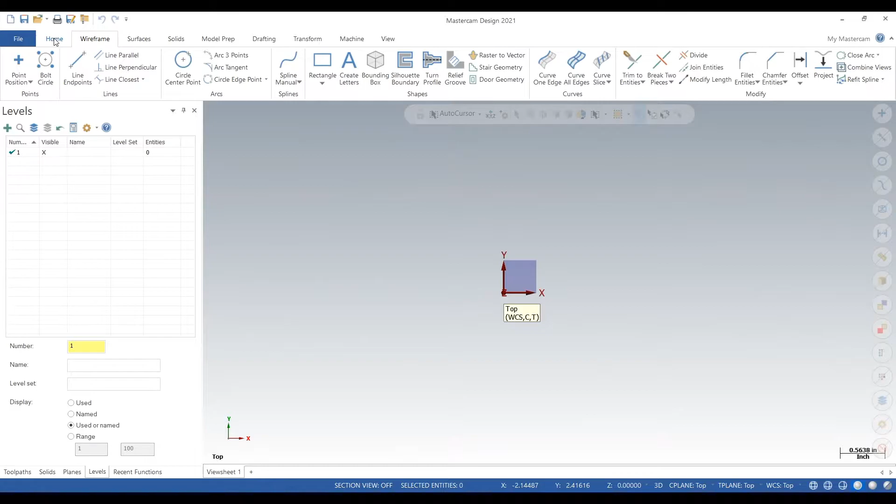So we're in Mastercam 2021, and what we want to do is start creating the vacuum fixture. We want to make an aluminum block, so we're going to draw some wireframe, and make our width 6 inches, height 6 inches, so 6 by 6.

Next, we want to go to solids and click on extrude. Click on our wireframe, click the check, and we'll give it a distance of 3 inches.

So there's our block. This is the very start of our vacuum fixture. So we start with a block.

Next, we click on curve all edges under wireframe. So we give that block, all of its edges will have wireframe, so we can click on it and program off of it.

Next, we want to duplicate that top plane. We'll call it our build plane, and we'll move it over to the side of the block.

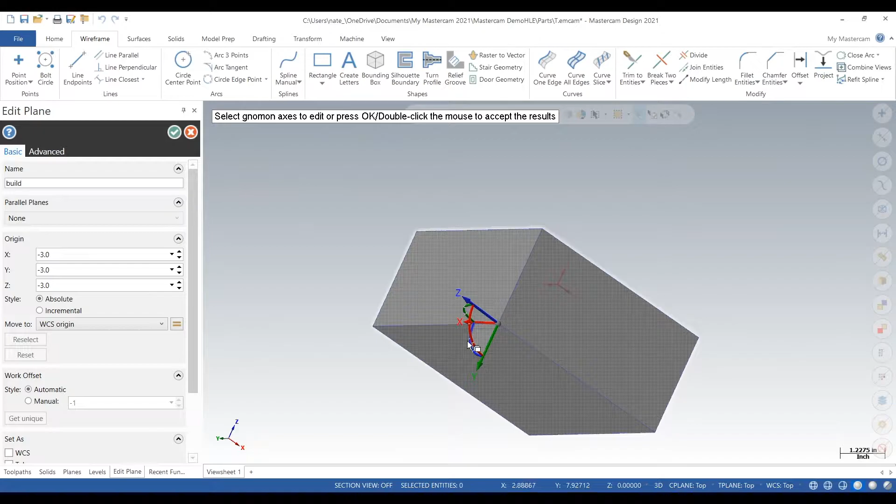We'll rotate everything so we kind of have a view of this side looking down. So rotate our Z 90 degrees. Rotate our Y, click the check.

We need to change that view because that's not quite what we want. Okay, that looks good. Now we are going to build the hole that the vacuum plugs into.

So we kind of want to do what we did before. We want to draw some wireframe and then extrude. So first we'll draw a line.

Oh, that's going the wrong way. Make sure our construction plane is correct. We can delete that line. We'll try this again.

Length, we'll type in 3/4 of an inch.

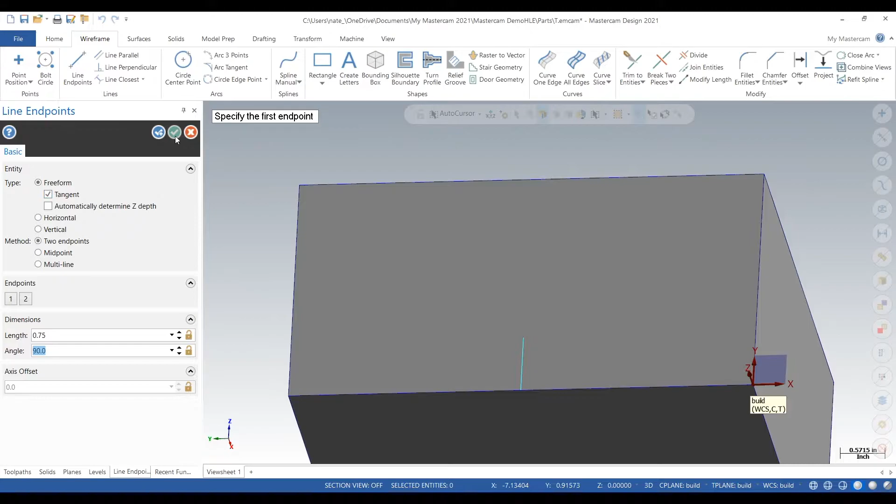Next, we want to go to easyspeedsandfeeds.com and find a pipe tap, because that's the fitting we'll be using. We'll be using a pipe tap fitting, and we're going to go to NPT NPTF.

And we'll use 1/4, so the hole we need to leave is 437 thou. So that's what we'll do. Make a circle that's 437 thou.

Okay, so that hole, we want it more towards the bottom. So we'll redo these steps.

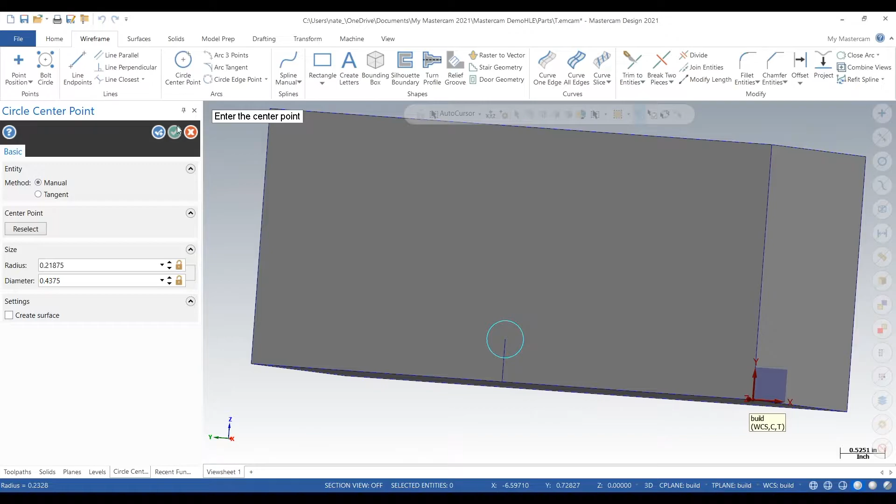And why we want it towards the bottom and this fixture extra thick is so we can reuse this fixture over and over again. If it was a thin fixture and we machine the top of it, we can maybe only get one use out of it. But if it's 3 inches thick, we can shave off the top and then remachine it in for a different part.

Okay, so we're extruding that hole. We want to go 5.5 inches into the fixture.

So our fitting will fit in that hole, our 1/4 18, and the vacuum will plug into that hole. So this is the beginning of our vacuum fixture.

So we're just checking everything here.

So what we want to do is merge this vacuum fixture with our part. I'll show you guys how to do that. So we'll save this, save it to my desktop, call it vacuum, call it vacuum chuck. Alright, so here's our part.

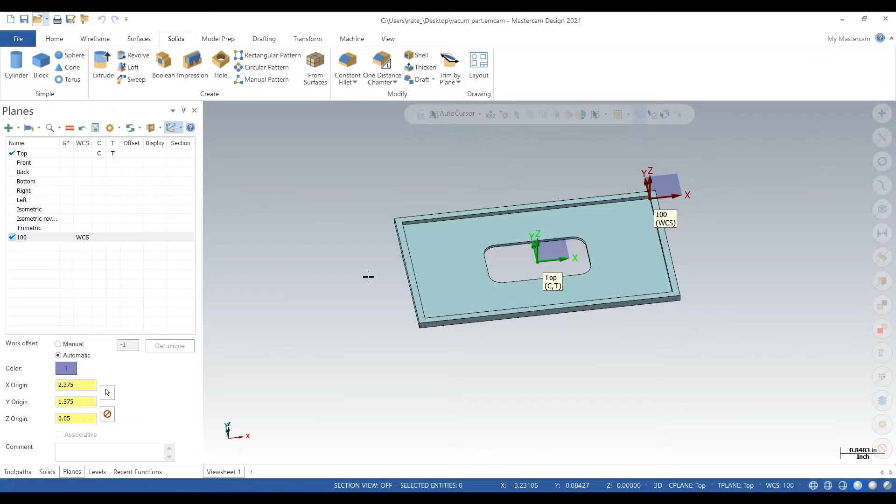It's very thin. And what we want to do is merge our vacuum fixture into this Mastercam file so we can put this part on top of it and then start designing how we're going to hold this part. So as you can see, that's 50 thou right there. So we definitely want to hold this with vacuum, pulling it down so we can machine this thing and we can machine it accurately. So we go to File, click on Merge.

And then we want to go back to desktop where we saved it, click on Vacuum. We clicked on the wrong one. That's the vacuum part. We want to click on the vacuum chuck.

So File, Merge, we go to desktop, click on vacuum chuck, and there it is. So that's how you merge two files in Mastercam.

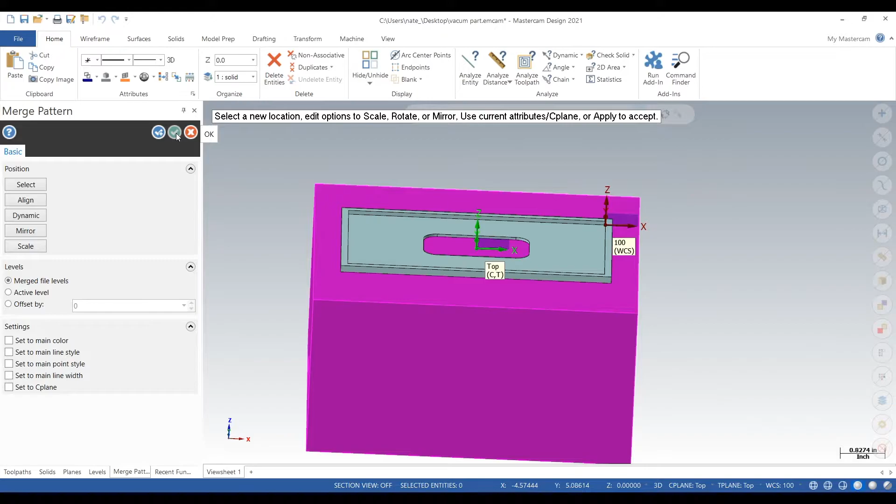Okay, so we got lucky and it kind of positioned itself really well.

So what we want to do, since we have all these solids, is we want to split them up on different levels. So we can activate different levels and just view either the vacuum chuck or the part or their wireframes.

So we'll create a level 3, call it vacuum chuck, create a level 4, call it vacuum chuck wireframe.

And we'll start moving this stuff around. So we'll select all wireframe and we'll move it to level 4. Next, we'll click on the vacuum solid and we'll move it to level 3.

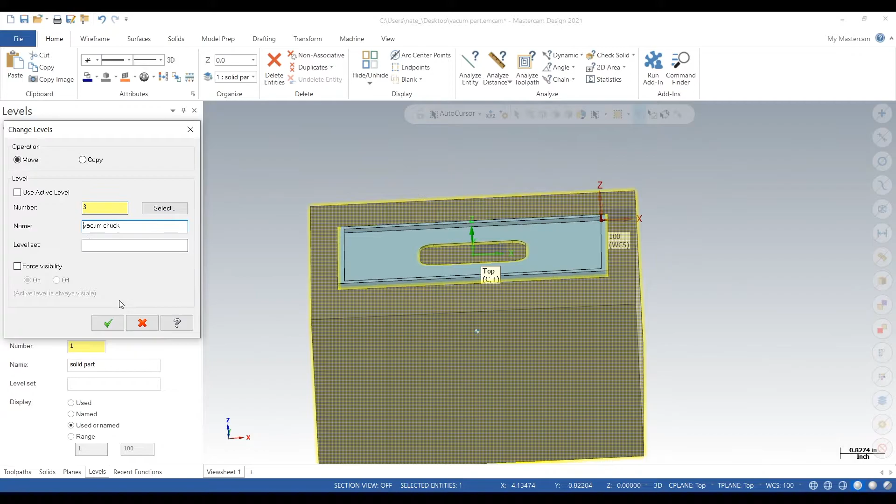So now we can activate these different levels and view our different solids. So here's our vacuum chuck. There's our solid part. That's pretty important. You keep everything on a different level so it's all organized and easy to work with.

So we're going to rename the plane 100 to build because we'll be moving it all over the place. Move that plane to the bottom of the part.

I want to select the part, go to wireframe, and click curve all edges, or silhouette boundary actually. This will just make a boundary on this face. But we went with curve all edges, which both work. So we'll just click on all this wireframe.

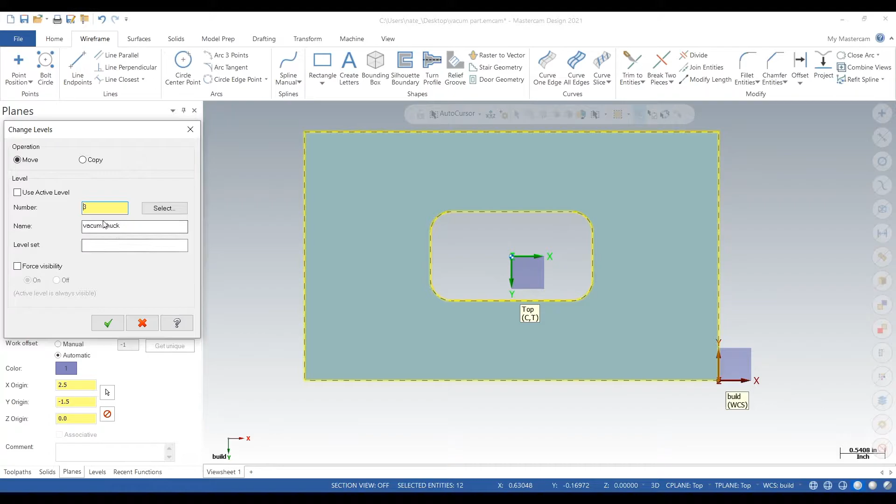And we're going to move it to level 3. So we're moving that wireframe to the vacuum chuck level. So now we can go to the vacuum chuck level and deselect our part. And now we have an outline of our part on the vacuum chuck level. That's kind of the first step of building a vacuum chuck, is you need a profile of your part.

So we're going to move our build plane to the top right corner of our vacuum chuck, and we're going to start designing and extruding and adding wireframe to this vacuum chuck so our part can fit in it.

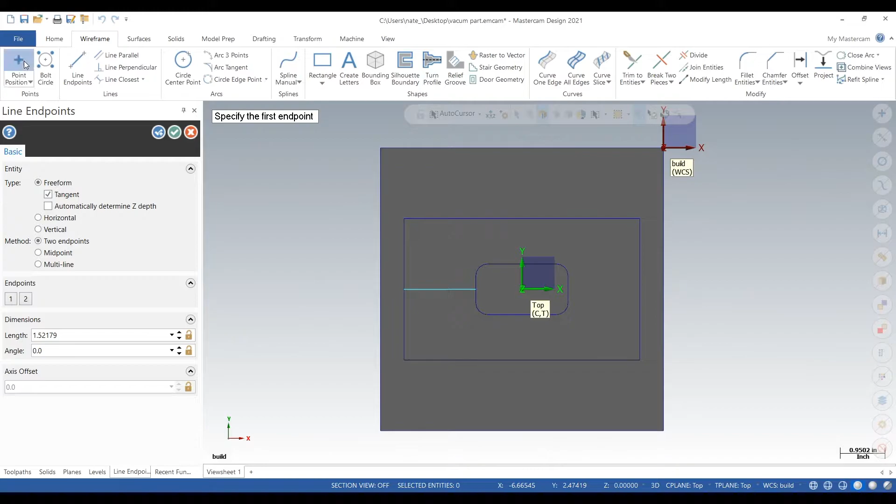So we're going to draw a line, and we're going to draw a point, and on that point we'll draw a circle, and then we'll extrude all the way down to that hole we put in earlier. So we'll call it 300 thou.

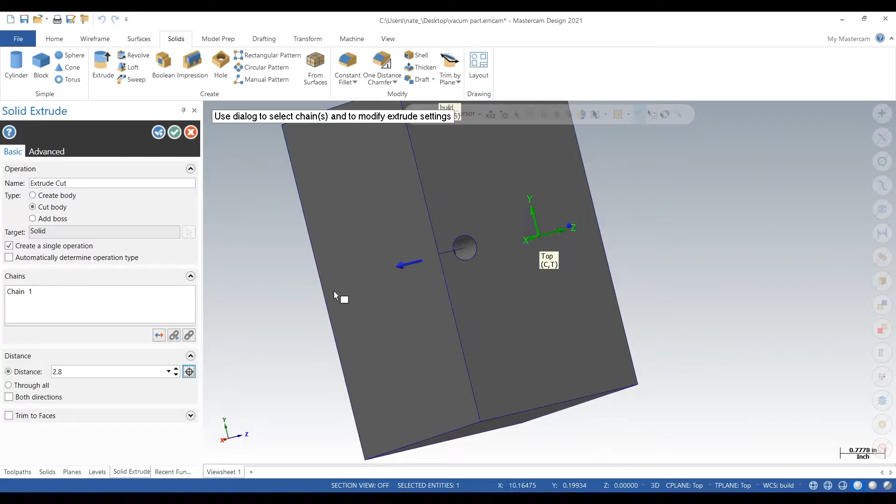And we are going to extrude that hole all the way down to our hole we put in earlier. That will create an airway. So the vacuum will pull through the hole on the side, suck air through there, and then it will go up to where our part is. Okay, looks like there's a good intersection there and it's not breaking through.

So next, we are going to create circles on all the corners of our boundary. What we want to do is relieve the corners so when we go around with an end mill, the part can fit in. See, if we didn't do this, the end mill would leave a radius in all these corners and our part would not fit in there.

So now we're going to go around and break up the wireframe so we can eventually add radiuses to these circles and create a much smoother looking boundary that we can program off of.

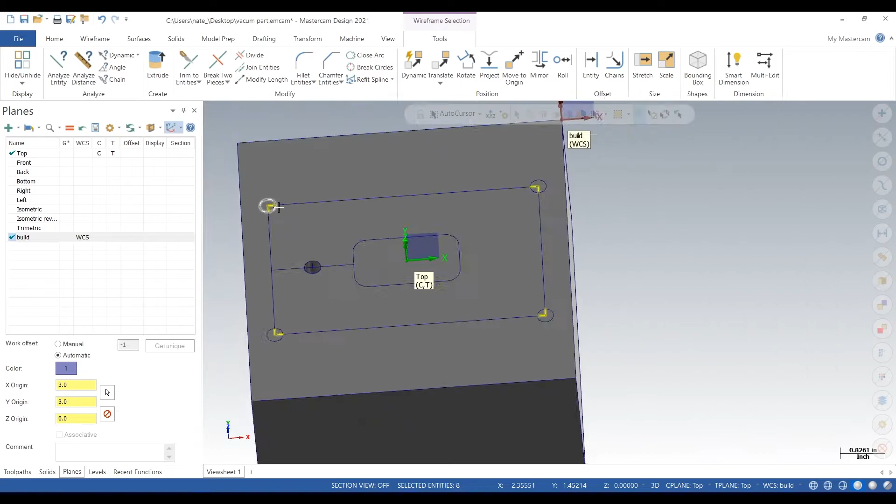So now we're going to try to add radiuses from our profile into our circles. And this takes some time because it's very easy to screw up and add the radius the wrong way. So you may need to break up your circles into smaller bits of wireframe. That's exactly what I'm doing right here. So 3 circles done, we'll go break up this one too.

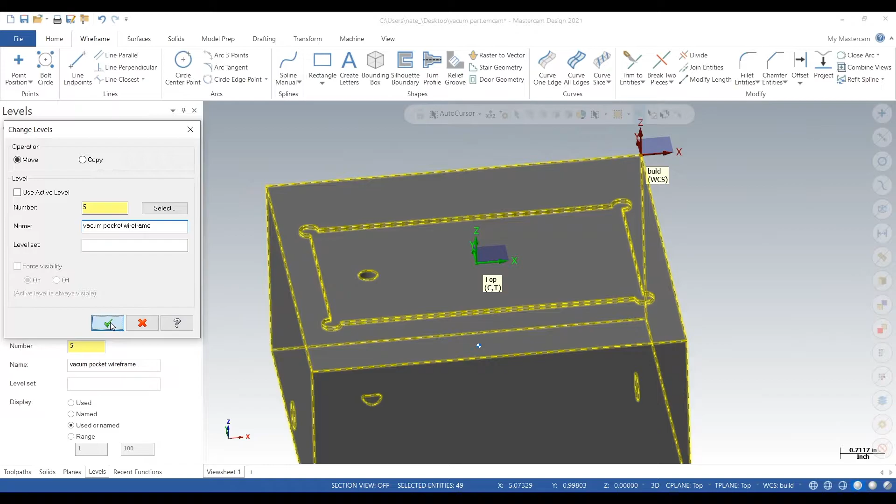Next, we're going to select the wireframe on the inside, move to level 5, and we want to, okay, so we selected that. We want to transform this wireframe out. Actually, we don't. We want to chain. Yeah, we want to chain this material out. So we just screwed up there.

We're going to click the back arrow after we save this. Yeah, so we'll come back to that step later. What we want to do right now is redo this wireframe real quick. And I'll show you guys why soon.

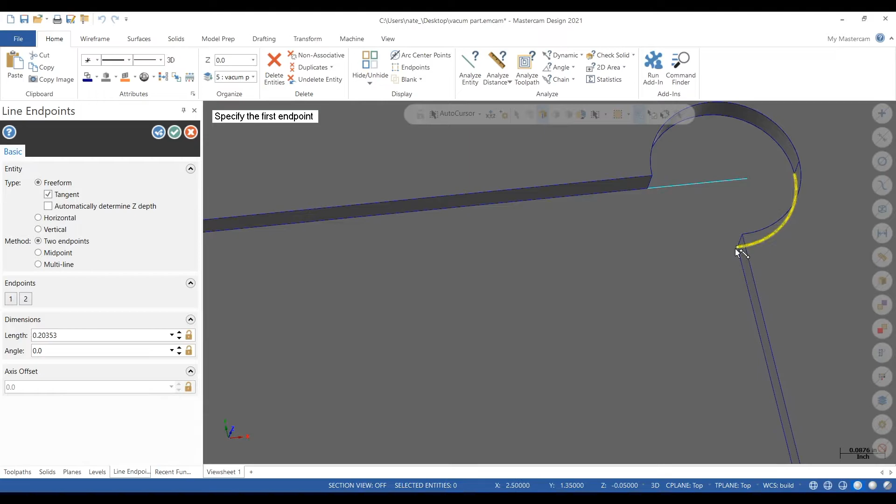I'll explain it now. What we want to do is add wireframe so we can make some seals. So we're going to add 2 rubber gaskets, one on the inside and one on the outside. The rubber gaskets are what keeps the vacuum sealed in. And it'll be much easier to visualize after we add it in. So right now, we want to kind of redo what we did earlier and have that square profile.

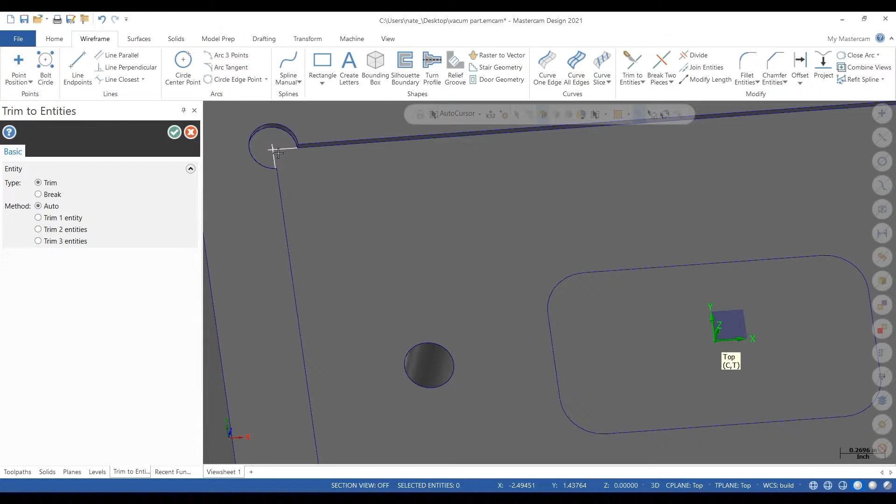We want to trim all of that together so we have some nice corners in there. And again, we are on the rubber gasket step. It'll be a lot easier to visualize once I show you guys. So we're adding the wireframe right now. We got our corners in there. We're going to go to chain. This is important. We want to click on that outer profile.

Okay. We want to click on the inside. We want to make the distance 50 thou. So that looks good. This is going to be the beginning of our gasket groove. So we'll clear our colors and we're going to do that step again.

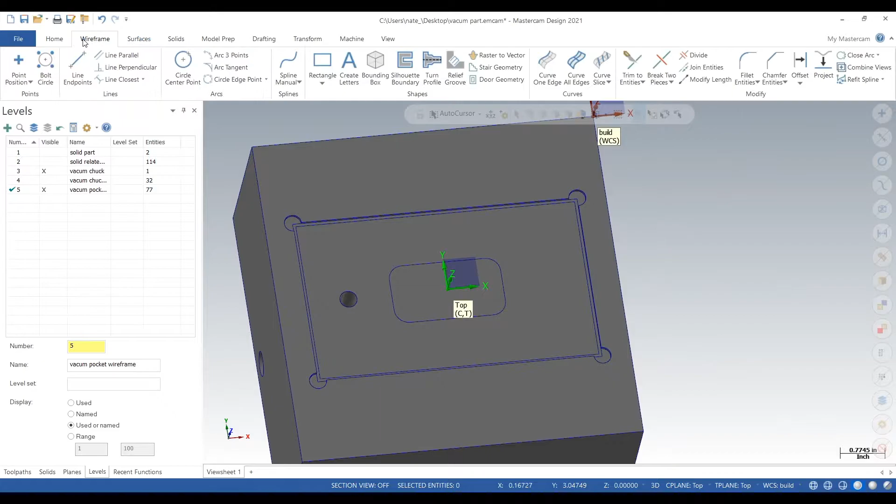After, we're going to first add some radiuses because a gasket doesn't fit in a square corner like that very easily. So some 200 thou radiuses should work out. Okay, so we left over some wireframe that we don't want. We're going to trim that away. Or in this case, we're just going to break up the lines.

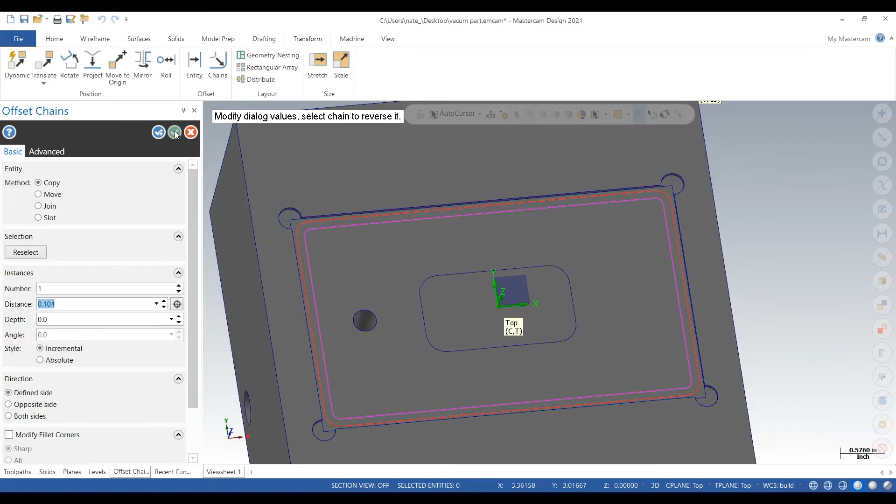Okay, so that's looking good. Oh, still got some more. So we're going to chain like before, select the inside, make the distance 104 thou. It's recommended that you go 100 thou with this gasket, but I just go just a little more. So that's the outer profile gasket.

Now we need an inner one because there's a hole through this part. We'll go 50 thou to start and then do that again. We'll go 104 thou. Okay, so we clear the colors. Now we got two gasket grooves, one on the outside, one on the inside, to hold that vacuum in. It's going to come through that hole, and then that vacuum is going to be trapped within these two gaskets.

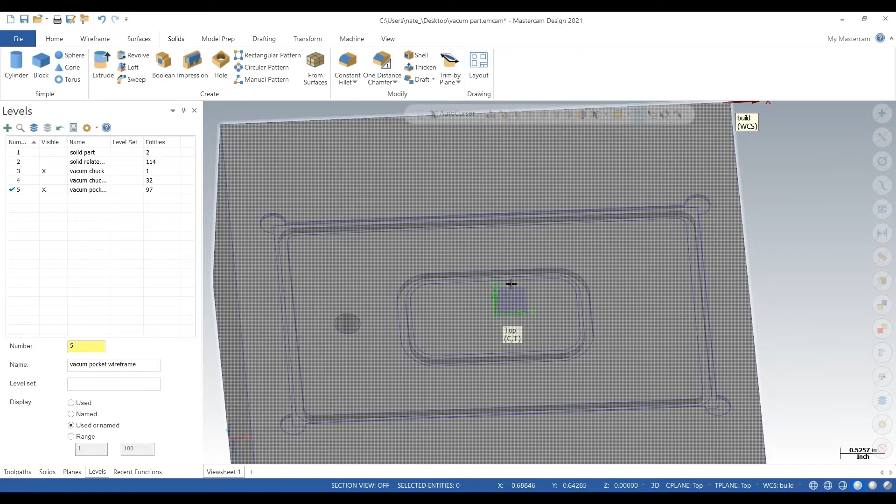Next, we want to extrude this gasket down. 90 thou. Next, we want to do the inner one also. So we go to extrude, select our wireframe, go down 90. So those are two gasket grooves that trap our air. If we didn't have the inner one, it could escape through the hole that goes through the part. If we didn't have the outer one, it could escape like through the corners of the part.

So next is like the fun part. We're gonna draw our airways. So it comes through that center hole, right? What we have to do is draw a wireframe maze in between our two gasket grooves. And what that's going to do is create like a suction that applies to the entire part.

So we'll create another level, call it level 6. And we won't do any extruding here. This is just going to be a wireframe thing. So we'll start out with a simple rectangle, like that. Next, we're going to draw wireframe that crosses through that pathway. And we want to cover as much of the area in between the two gasket grooves that we can.

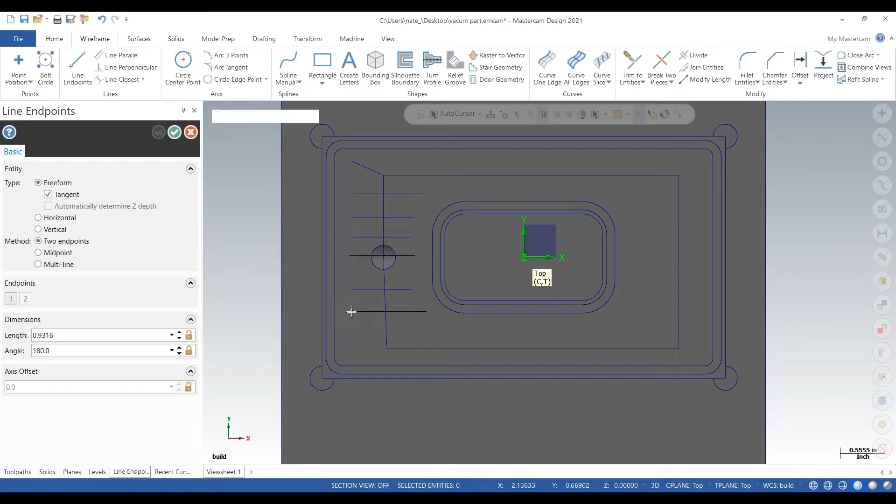What we're going to do after we draw all these airways is we're going to take a ball end mill and machine along the center of this wireframe, and it's all going to lead back to this hole. So it's going to come through the hole, and then the air is going to go through all these grooves and create a suction on this part. And if we have wireframe that goes almost all over the surface of the part, it's going to hold it down really well.

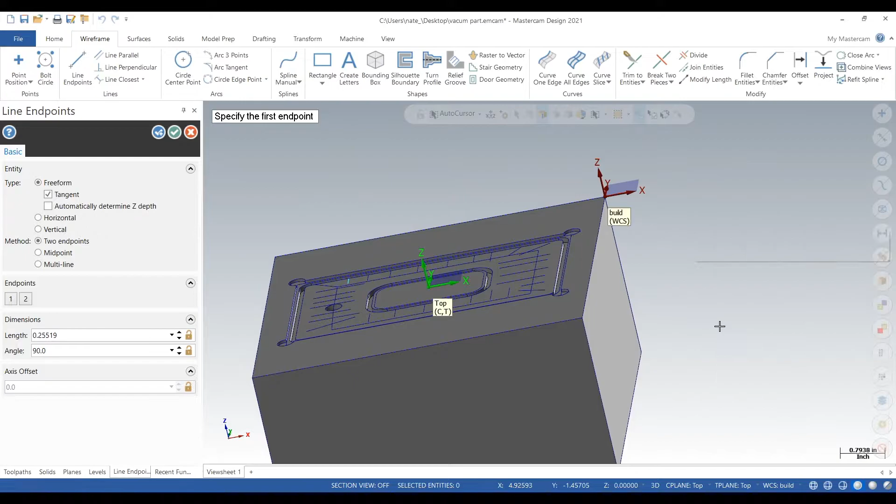So again, we're covering almost the entirety of the part without intersecting the gasket grooves. You can't have an airway that does that, otherwise you'll lose vacuum. You want to keep the vacuum within. Okay, so that's looking good. And what we're going to do is we're going to machine this entire thing. We're going to program all of it so you guys can visualize this thing.

So next, I'm just going to select all that wireframe I drew. And I'm going to move to level 6. Again, organization is key when doing something like this. And there we go. We got a start to our vacuum fixture. What we need to do next is program all the tool paths and then run this thing and verify so you guys can see how the part will sit in.

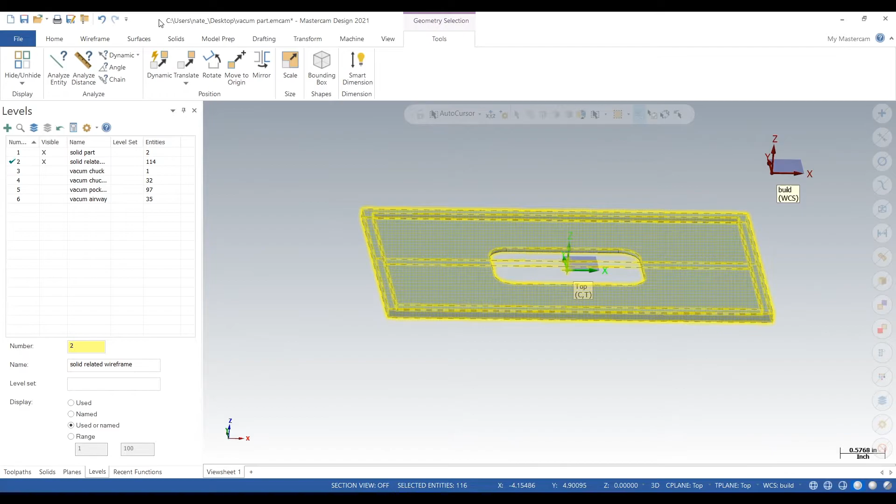So what we want to do is we want to drop this part in the pocket. We want to visualize how it's going to look like. So we'll translate the wireframe and that solid down 50 thou. Next, we'll just select the solid part and solid vacuum fixture, and that is how it should look in the machine. So our part is sitting on those two rubber gasket seals, and then our airway should pull it down.

So that's pretty cool. That's a cool setup. It's going to work really, really well. So we saved it. Now we want to add toolpaths, and we want to run it through verify and double check how it's going to look.

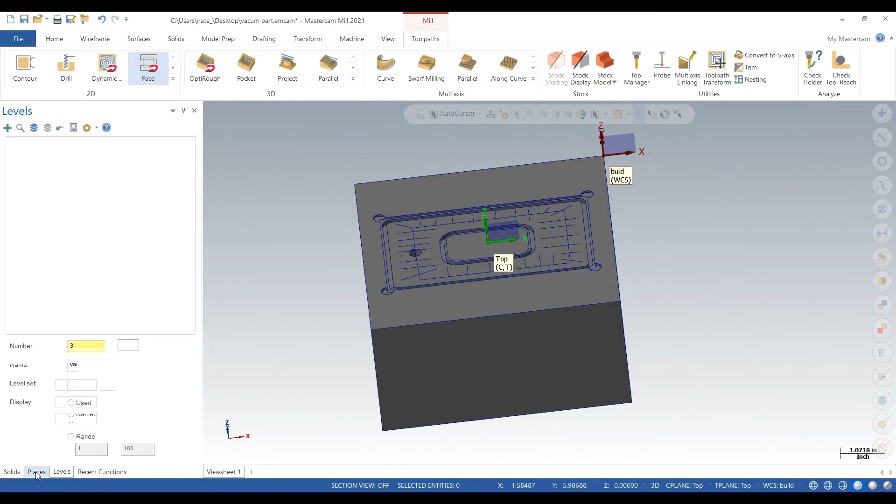Okay, so now we want to machine this part. So we're going to set up our toolpaths. First, when you set up our machine, we're going to go to Mill, Default. And we need to get our Machine tab back open. It's not there, so we're going to go to View. And then we're going to click on Toolpaths. Delete one of those machine groups. Okay, so we got our machine definition. Now we just need to start adding some toolpaths.

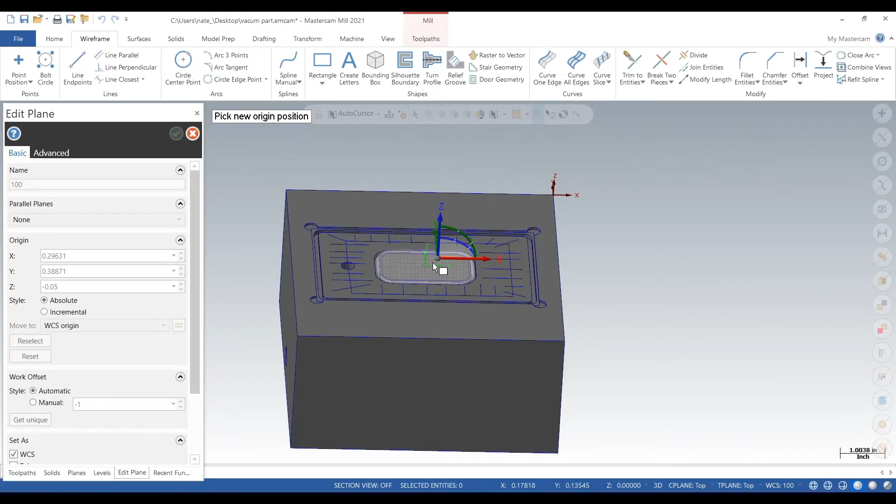We'll duplicate the build work coordinate system, call it 100. We're going to move the gnomon to the center. We're going to check it's at the right Z level, which it is. Then next, before we do our toolpaths, we want to just add some stock. So we'll create a rectangle. And we'll pretend our stock piece of aluminum is 6.25 by 6.25.

Create another level and call it stock. Op 100. So we can move that stock to level 7. Keep everything organized.

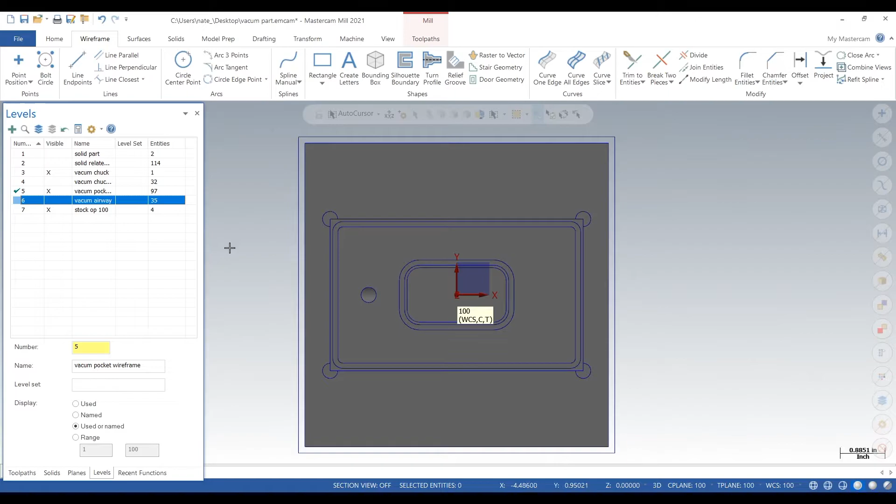Okay, now we can start adding some toolpaths. We'll do a facing toolpath first, and we'll select the stock. Click the check. Go to Tool. Go to Filter. And we want to find a 1/2 inch end mill. We'll edit the tool. And this tool, we're going to edit it and make it extra long and undercut.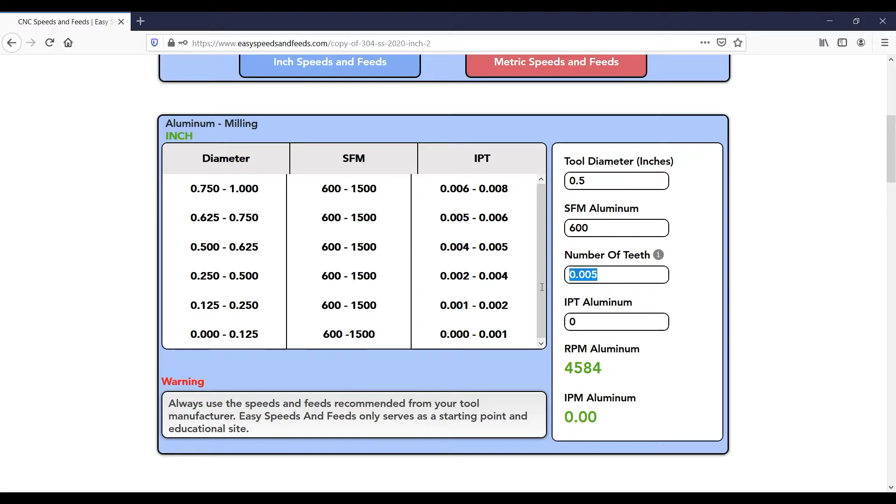Next, we want to make the tool number 1. Our speeds and feeds, we'll go to easyspeedsandfeeds.com and we'll start calculating out some speeds and feeds for this extra long tool. So 500 thou diameter, surface feet, we'll use 600, number of teeth, it's 3. 3 teeth, and then inch per tooth, we're going to use 5 thou. But with the end mill being so long, we're going to crank that down a little bit to 3 thou.

So we'll type in 40 inches a minute, 4,500 RPM. We'll go zigzag, put stock to leave on floors at 0, click the check. Let's see what it generated. Okay, that looks good.

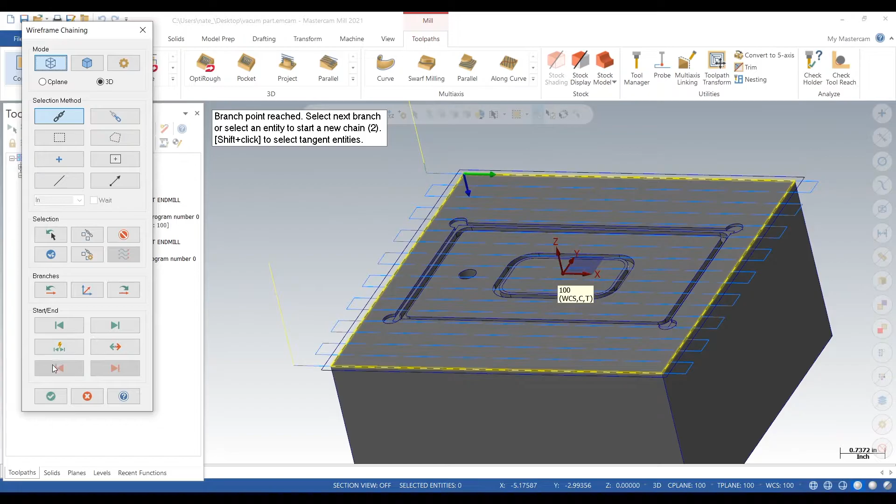Next, we want to contour around this part. Cut parameters, we will be doing a ramp, linking. We're going to select our depth here. We'll type in minus 3.1 to go 100th further than the bottom. Our ramp, we're going to do it by depth. We'll make it a depth of 1/4 inch. So every time it goes around the perimeter of the part, it'll go down 1/4 inch in Z.

Finish, we'll do a 10th finish. That all looks good. We'll regen our speeds and feeds. So there we go. We face the part and we're doing a ramp around the part. Now we go to stock setup. We should have done this first, but we can do it now.

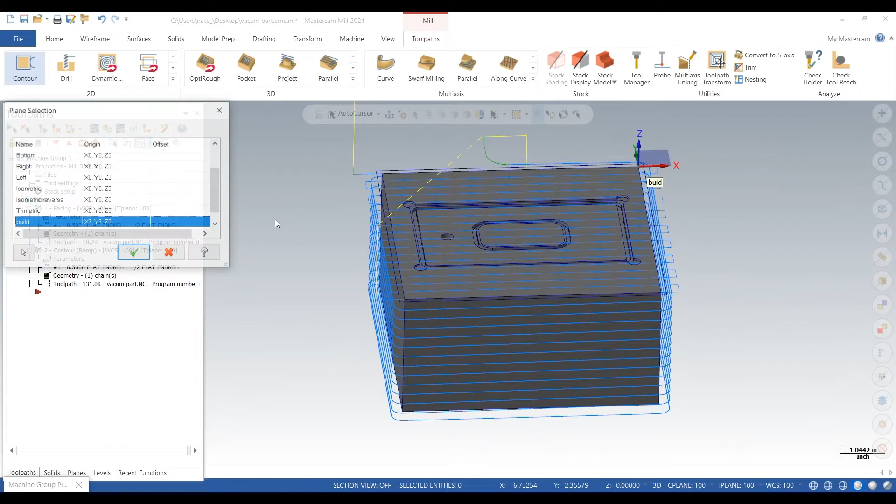Select the 100 plane. Click on bounding box and select the stock. Type in our Z value of 3.25. Click where the work coordinate system is. We'll type in 10th for Z, so it takes 10th off the top. Now we can verify. We'll be using a lot of verify for this video.

Okay, so that looks good. That's doing its finish pass. Awesome. So pretty simple so far, just facing and contouring around the part. Next, we'll create a new toolpath, call it 200. Rename the first machine group to vacuum chuck. So this is vacuum chuck operation 200, or operation 2 you can call it.

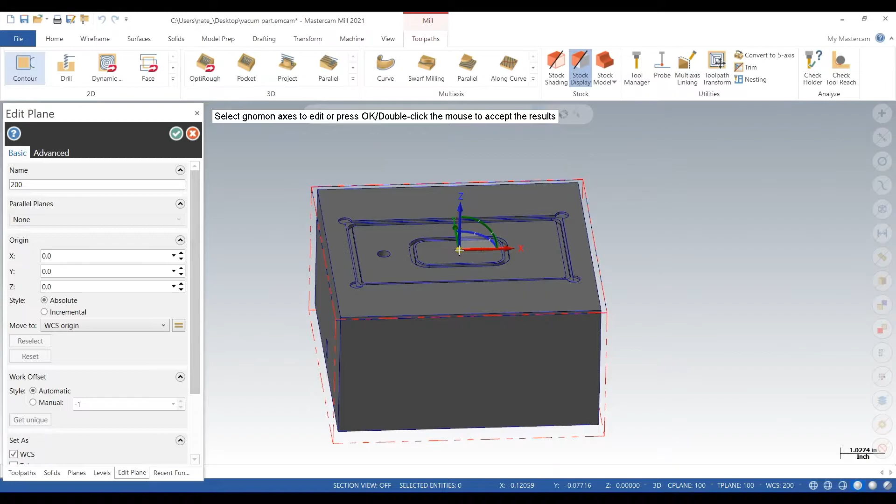So we'll duplicate level 100, we'll call it 200, and we'll move our gnomon to the other side of the part. Click the check, and now we're ready to go. Toolpaths, we want to probably dynamic mill all the stock off the back. We can do a peel mill because facing it might take a while. We'll select a couple lines for our peel mill to follow. Click the check.

And we're going to select a different end mill, a stubbier one, so we can take the material off faster. So we just select a 1/2 inch, we'll edit the tool. Click next, call it tool. We'll have to switch that, but we're going to look up speeds and feeds right now. We use 1200 surface feet, and we'll crank up the inch per tooth to 5 thou. So that's much faster than our last tool because it's stubbier. Okay, we'll type that in, 130 inches a minute. Go 9,000.

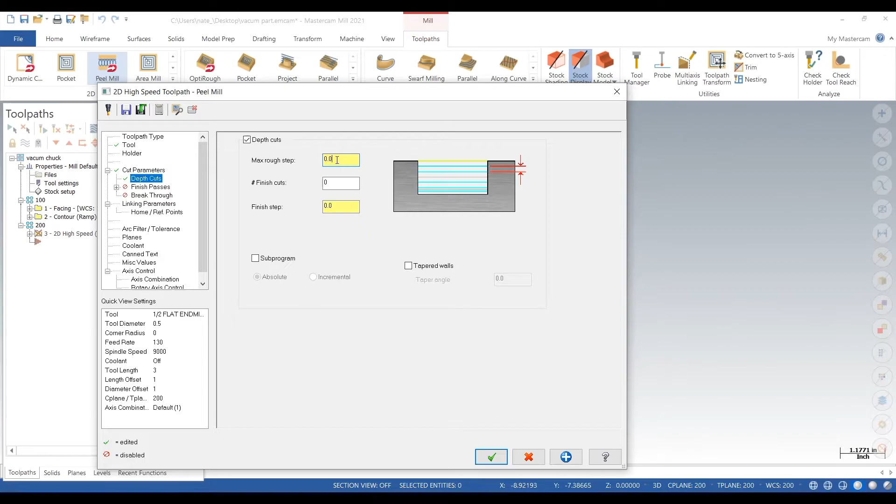Cut parameters, stock to leave on walls, 0, stock to leave on floors, 0. We'll add a depth cut, and we'll put in a finish step. Our depth will be 0. We'll go ahead and generate this toolpath and just see how it looks. We'll make some changes, but we're just going to see. Okay, so that's looking good. We'll select both of our ops and we'll verify.

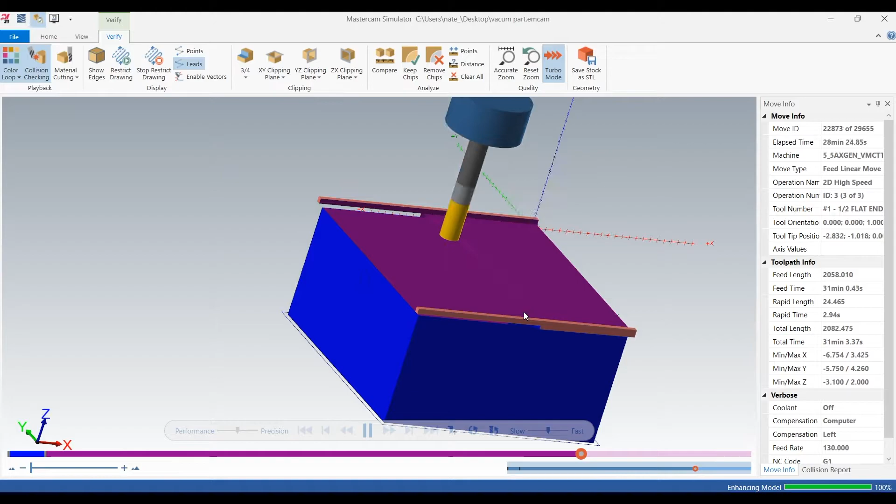So we got a couple problems going on here. Our peel mill isn't taking off enough material, but also our contour did not go to the correct depth. And also our peel mill finish pass is taking off too much. So we have some changes to make. So first, the peel mill, we'll change this around. Stock to leave on walls will go minus 300. So this could go 300 thou past that wireframe. Finish step will go 5 thou.

Contour ramp, we need to change this too. Go to cut parameters. Make pass at final depth. So we're going to regen that and regen the dynamic peel mill. Now we go back into verify after selecting those two. Now we're going to watch this again and see what happens. So it looks like it's going to the correct depth now. Our peel mill is taking off all the stock. That's what we want.

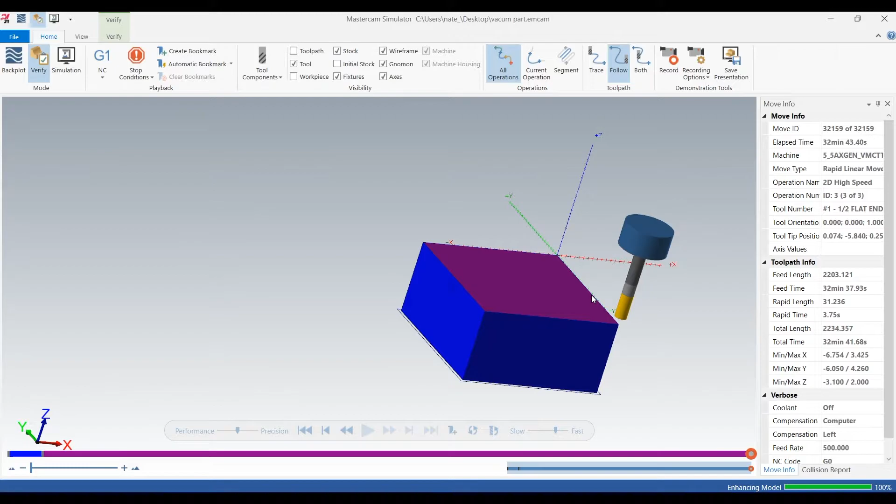Okay, so we got a block. After this, we got op 1 and 2 done, we need to add the side hole and our airway, and then we can start actually machining the pattern for the vacuum, actually make this thing a vacuum chuck and not just a block.

So as before, we're going to call our next toolpath 300. We're going to duplicate our plane and call that 300. Keep everything organized. And we're going to move it to the face with the hole. Now we did just make a mistake. We didn't duplicate 200, we just moved it, so now we have to move it back and regen operation 200.

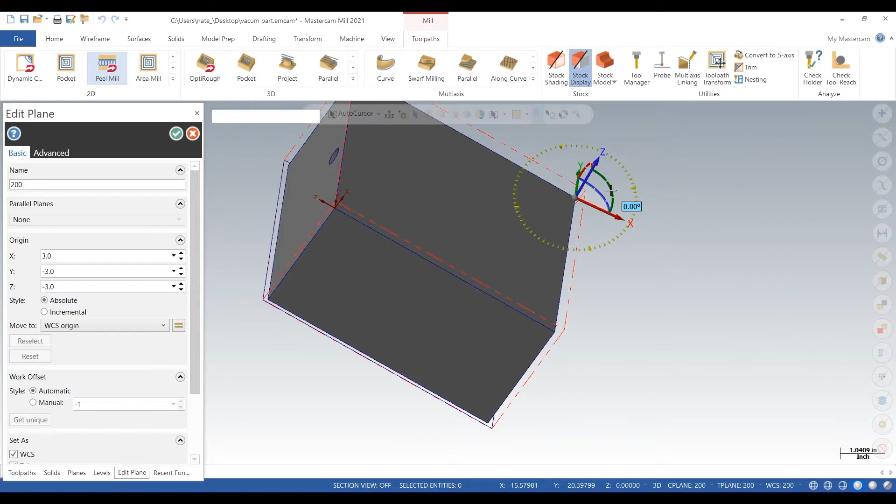So let's regen that toolpath. Now let's duplicate 200, call it 300. Now let's move that 300. That is the correct way of doing it. Okay, so we'll pick up off that corner. Rotate our X and Y around. Now we can drill this hole out.

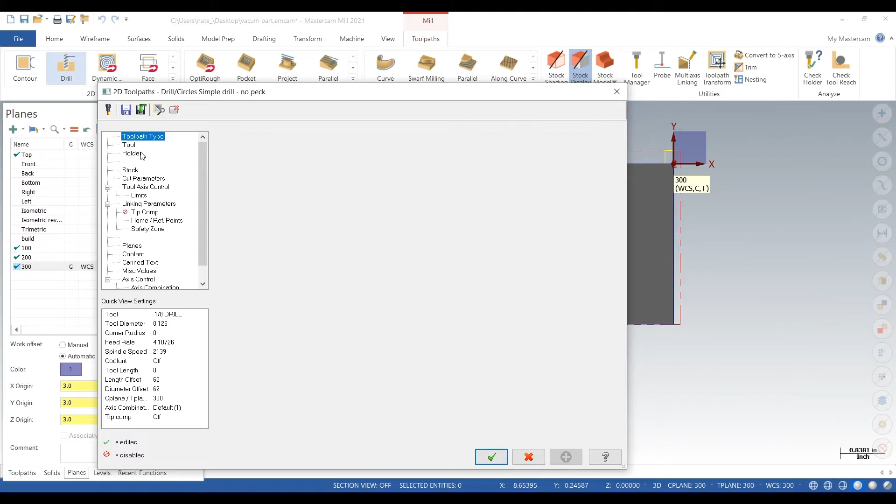So select that hole, click the check, go to Tool. First we're going to correct a mistake here. We'll turn that Tool 1 into Tool 2. That was a shorter end mill, and the Tool 1 is a longer end mill. Now, we need to find a spot drill big enough for that hole. So we'll click Filter, click on None, find the spot drill.

Now we'll use 3/4 of an inch because you have to keep in mind a 1/4-18 NPT tap is going to go in there. So this needs to be a big spot. Call it tool 3, go 3 inches a minute and 4,000. Drill counterbore, that looks good. Linking, we want to add a clearance, 2 inches.

Now we want to calculate our depth. So the finished diameter, we want it to be 550 thou, and it calculated how far it needs to go and added it in. So we'll overwrite the depth. There we go. So again, we're going to select all of our ops and hit verify.

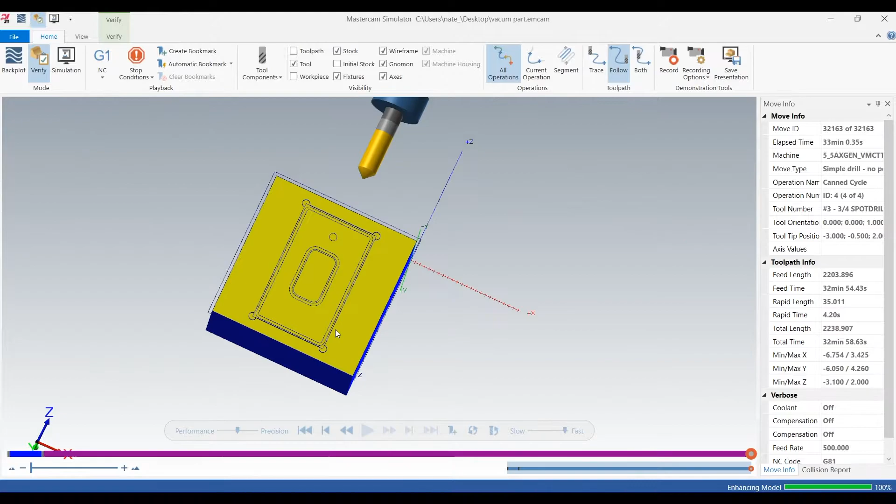So it spotted it. The spot is bigger than that hole, which is good. So that'll be a nice lead-in for our 1/4-18 NPT. Next, we'll go to drill again. We'll select that hole. And we want to select a drill big enough and long enough, actually, because we have to go 5.5 inches in. Find drill, click the check. Now we're going to find a drill that's 437 thou, 7/16.

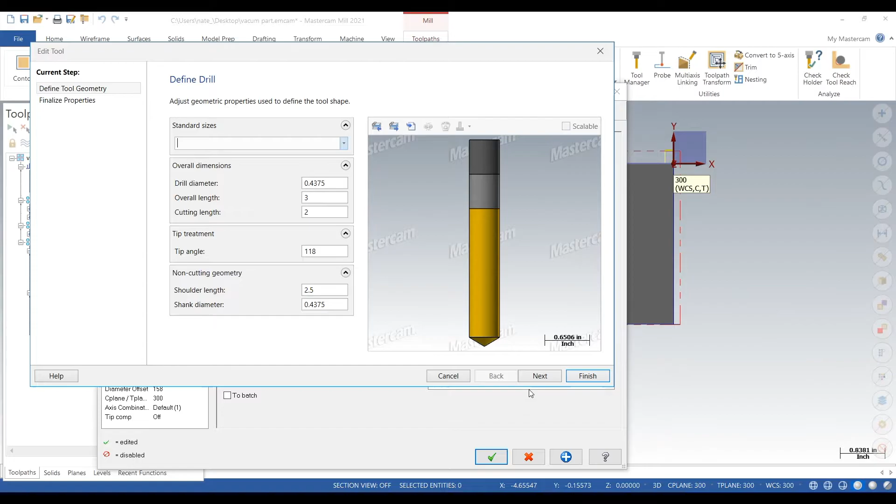Right click, click edit. Now we want to adjust some things on this drill. First, we'll call it tool 4. Speeds and feeds, we'll go to easyspeedsandfeeds.com. Go down to high speed steel drills. Type in your tool diameter. Type in the surface footage you want to use. I typed in 200 because this is a longer drill.

We'll go 5 thou. So we're going a little bit lighter just because this thing's long. We don't want any chatter as it's entering that hole. Feed rate 8, spindle speed 1750. Linking parameters. We'll change drill counterbore to peck drill. We'll go 25 thou increments. We'll click the check.

Call it good. So on that toolpath, I made a couple mistakes. The linking parameter should have been minus 5.5 inches, and we didn't edit our tool to be long enough. But all that will be picked up and verified later in the video.

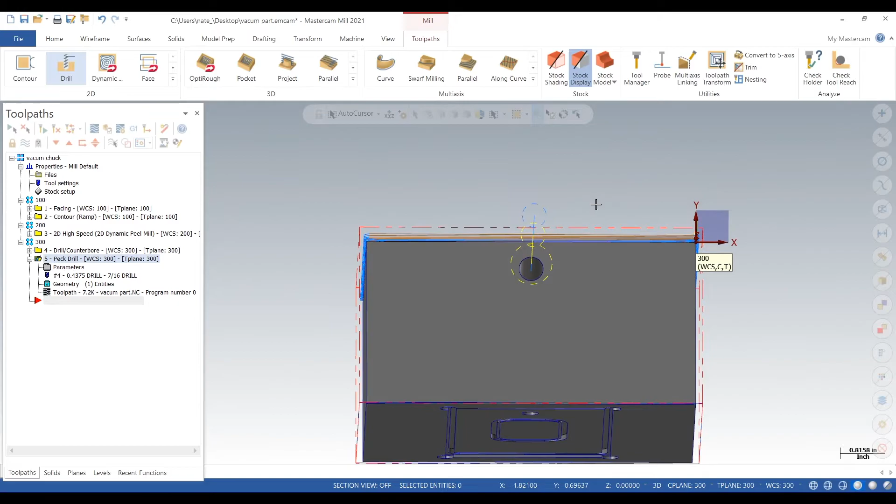Next, we're going to go for tap. Now, we can't actually find the 1/4 NPT tap in Mastercam, so we end up skipping it. But you could probably easily draw or create the 1/4 NPT tap, but we just didn't have time for this video, so we skipped that.

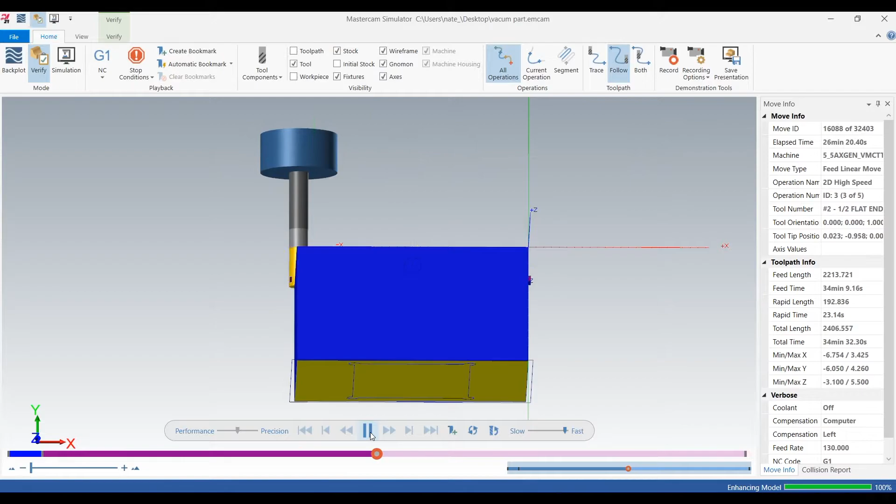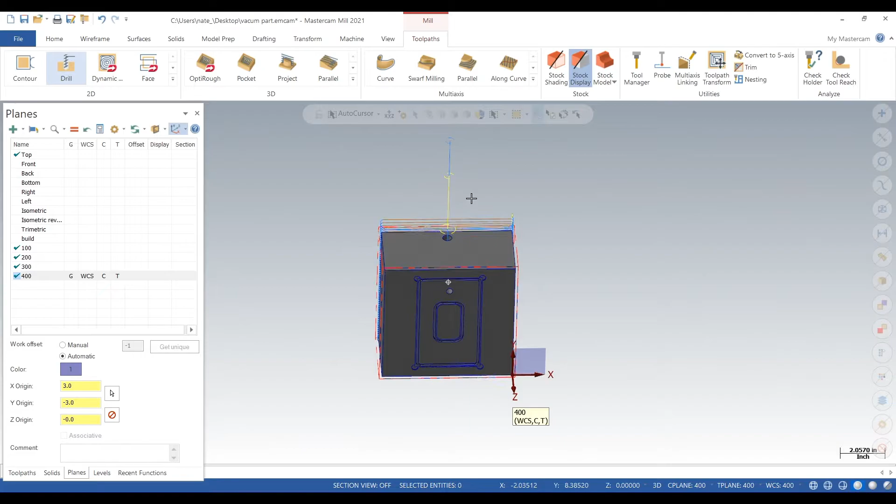But I didn't pick up on it yet, so we're moving to operation 400. So we duplicate 300, call it 400. Then we move the gnomon to the face we want to machine, which is the face with the vacuum pattern on it. So we're going to move our X and Y around.

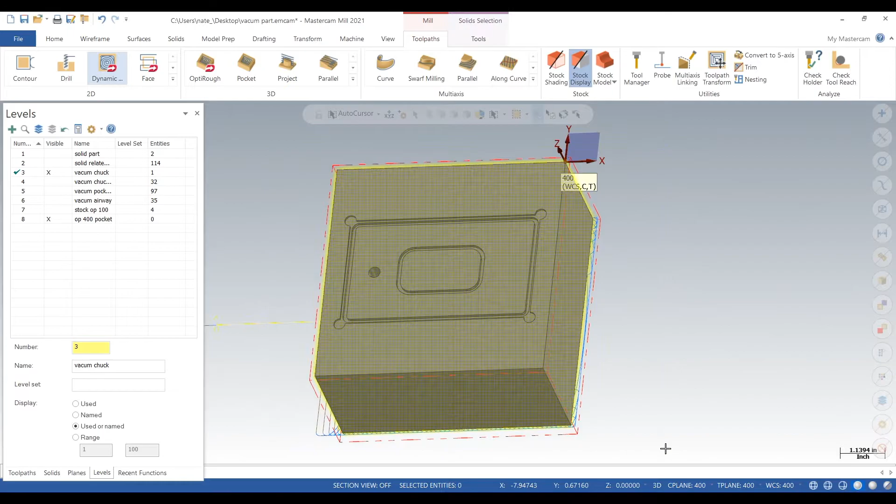And now we can start machining our vacuum pattern and turn this block into an actual vacuum chuck. So, first thing we want to do is dynamic mill out all the stock we can. We'll activate the necessary levels to do that. We're actually going to add a level called Op 400 Pocket. And we're going to select this block, do curve all edges, we'll click the check, move all that wireframe to level 8, so Op 400 Pocket.

So we call it Op 400 Pocket because this is Operation 400, work coordinate system 400. So everything's organized. We can go back and select all the proper levels and planes and edit things easier. So new toolpath group called 400 to go with our plane and level. So we'll click on dynamic. And we are going to select the appropriate wireframe.

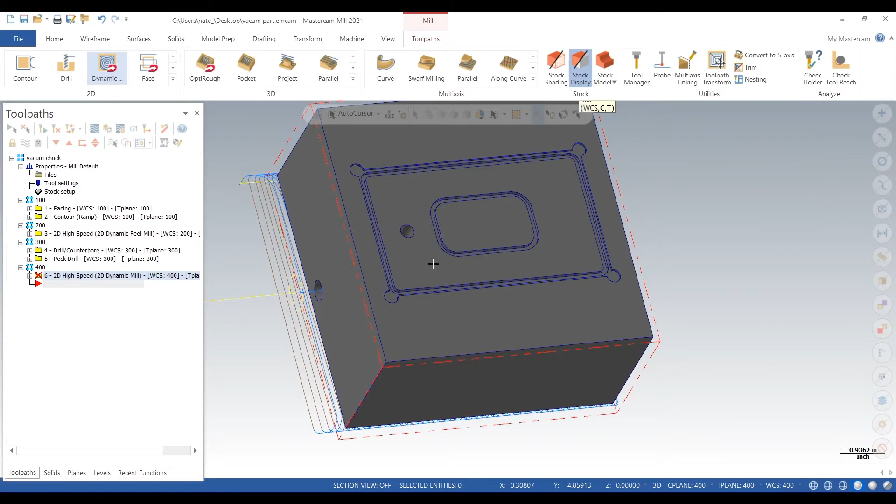Now we're having trouble here because we don't have chain in the selection method. We have single line selected where we should have chain, where it just auto chains a bunch of connected wireframes together. So we play around for this for a little bit, and then we realize that we don't have chain selected.

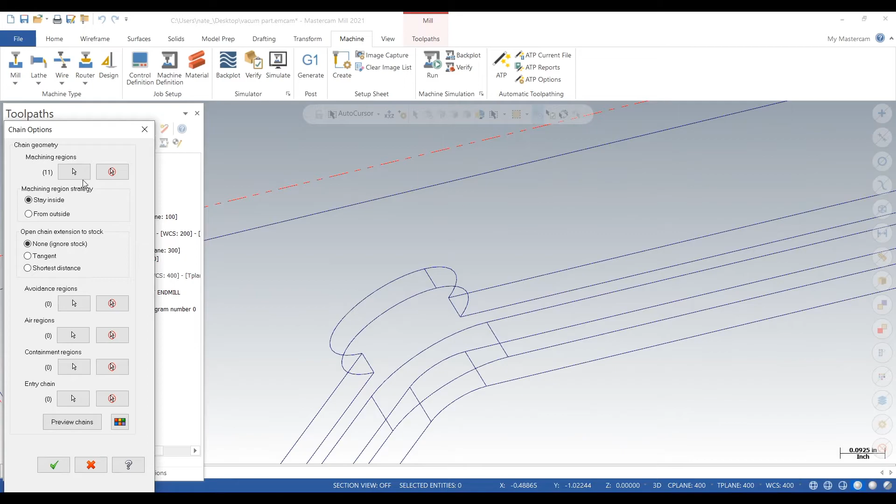See, it says 11 where it should just say 1 in machining regions. You want 1 machining region. Now we go ahead and select our tool. Choose a 1/4 inch. Call it Tool 5. We go to easyspeedsandfeeds.com. Go up to milling. Type in 1/4 inch.

We put our surface feet at 700 because our spindle only goes 10,000, so we can't go the max surface feet. Inch per tooth, we go 3 thou. We go 2 thou 5/10 actually. We type all that info in. (10,000 RPM). We click finish.

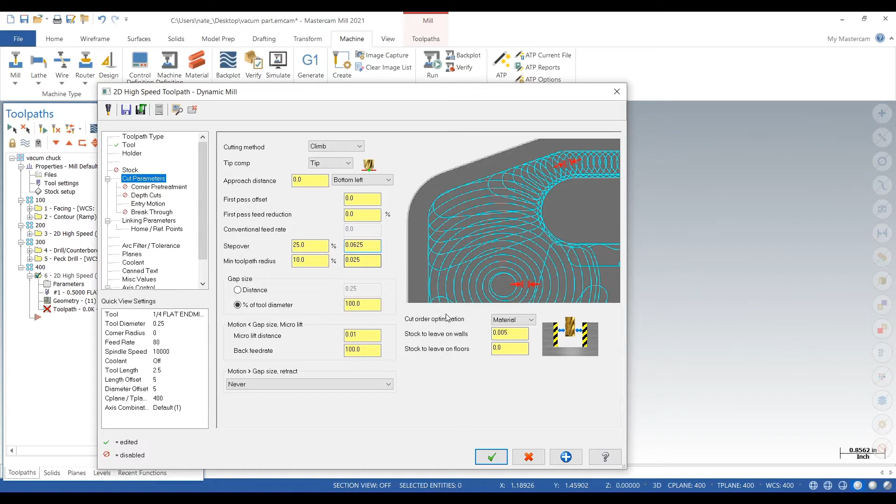Our depth, we select it. So 50 thou, that seems right. Plunge angle, we go 1 degree. Depth cuts, we add a finish pass. (5 thou). Okay, so we try to generate this toolpath here, but because we didn't have chain selected, it couldn't create a toolpath. So we deselect all those. We try this again. We click on everything.

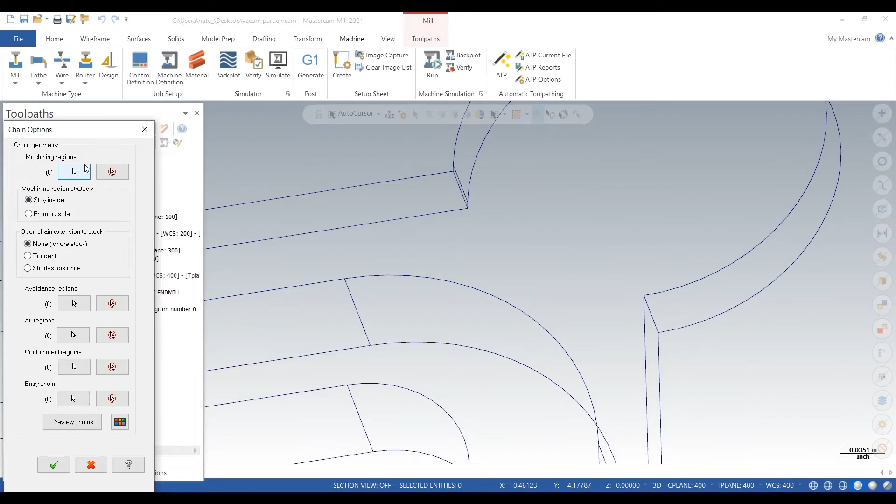So we figured it out. We didn't have chain selected. So when you go click on chain, it should auto chain all the wireframe together. It didn't this time, but it should only be 1 machining region, not 11. So we zoom up and make sure we get that last little piece. We'll click the check, and machining regions is 1. Now we can regen that toolpath. And it looks like you made a good toolpath there.

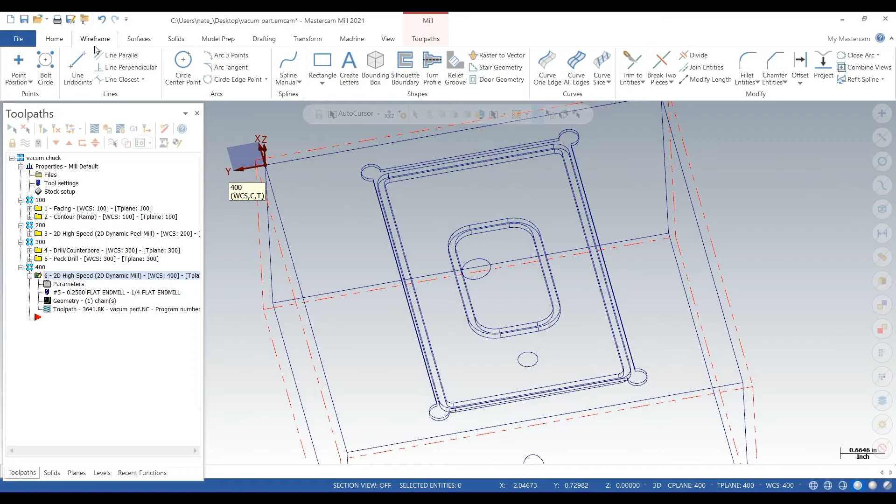Next, we want to measure the distance between those 2 corners. And we want to make sure that a 1/4 inch end mill can fit in there. And through our measurements, we find that's 212 thou. So a 1/4 inch end mill will not fit in there. So we have to add another toolpath that can work. So we're going to select that wireframe again.

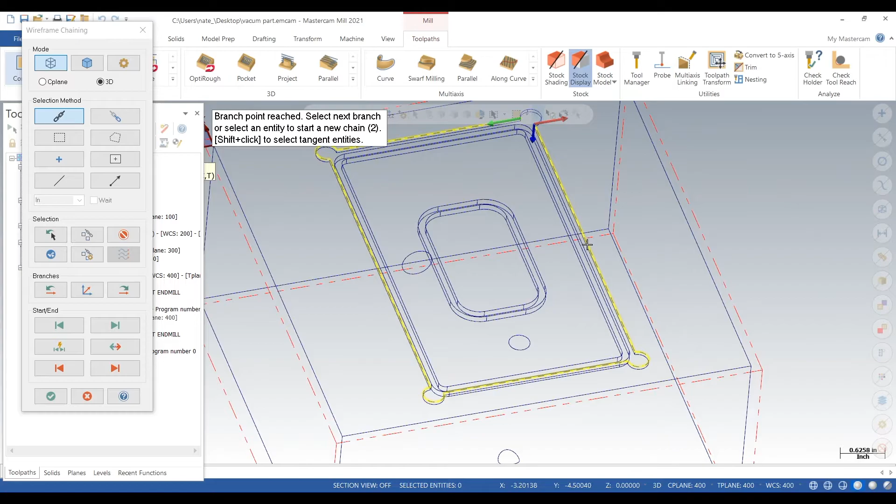Go select library tool, click on filter. Click on flat end mill. We're going to find a tool that can fit in there. Go with an 1/8 inch. Edit the tool. Click next. Tool number, we'll call it 6. Next, we go to easyspeedsandfeeds.com and find some speeds and feeds for an 1/8 incher.

We'll use 350 surface feet. And for inch per tooth, we'll use 1 thou. So we go 30 inches a minute. We'll go 10 grand. We'll just do 2D. Our depth will be 50 thou. Multi-passes, yes. Depth cuts, no. Click the check.

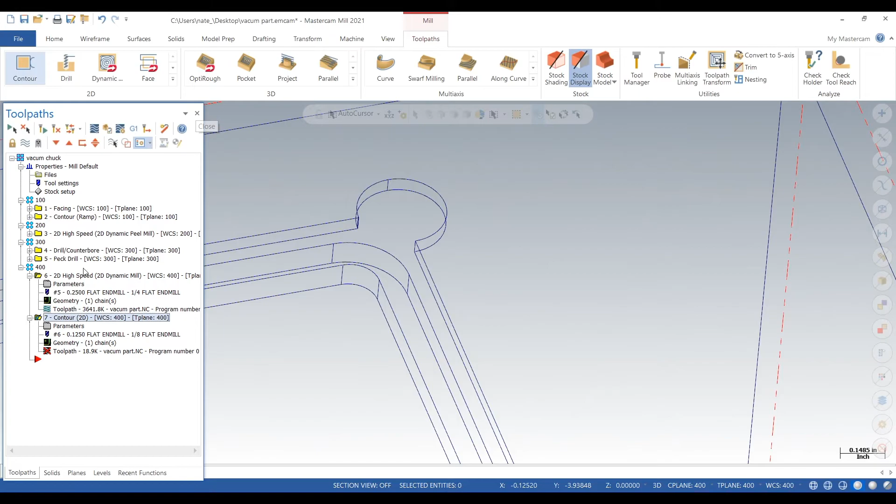Go back into parameters. Go to lead in and lead out. We'll just turn them off. I didn't really like the way that tool path generated, so we'll regen that. And we're going to run a verify here. So it's dynamic milling out all that stock and it's leaving those corners in there. Then next it goes in and contours. So that contour looks good, but it left just a little bit of stock in the middle. We want to remove that.

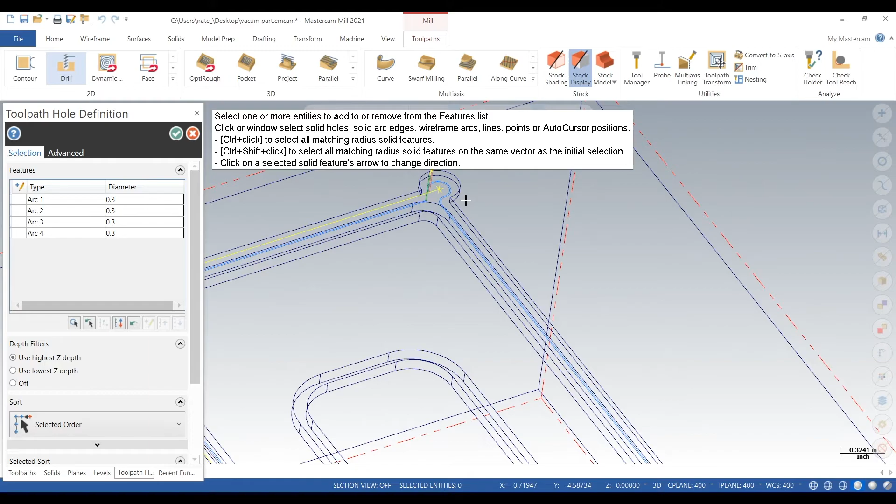So we're going to do a drill move. And we're just going to select the center of those circles. And we're going to drill with the 1/8 incher. Or the 1/4 incher, that works. Feed rate, we're going to just go real slow. We'll call it 3. Depth, 50 thou. We'll just do drill counter bore.

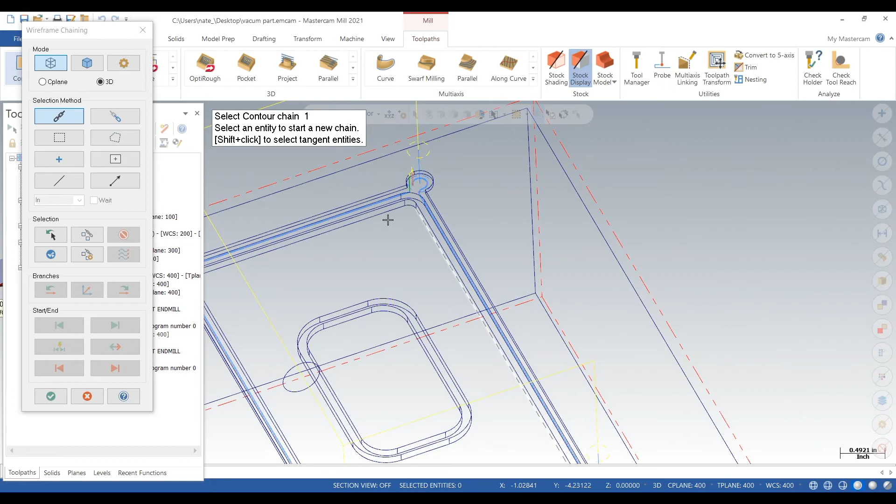So we'll click on vacuum chuck, click verify, and we'll see this time if it leaves material in those relief corners. So it looks like it took that material out, which is good. Yeah. So that's a good start to our vacuum block. So that pocket will hold our part. And we still need to add the grooves. So we're going to select those grooves.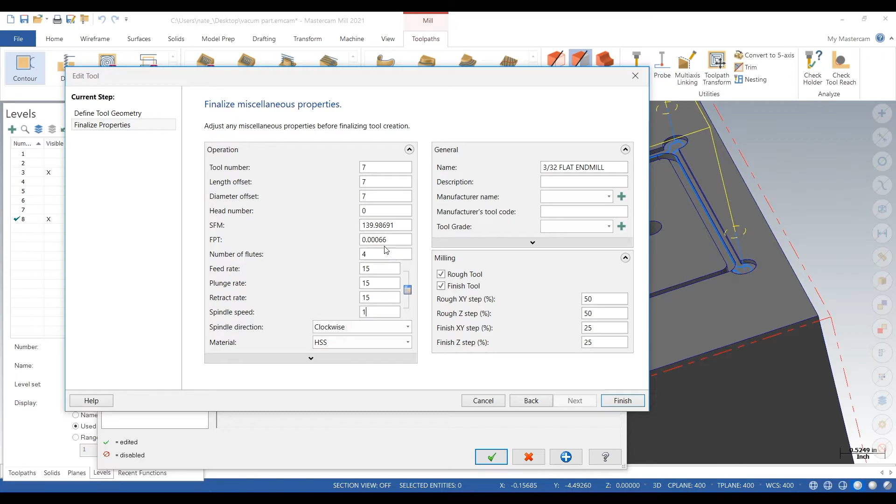Okay, we have the outer selected. Now we'll go to Tool, select Library Tool, click on Filter, or actually, there it is. We'll use a 3/32. Click Edit Tool. And yeah, we'll make it Tool 7. Now time for more speeds and feeds. We type in all of our information. Feed rate 15, spindle speed 10,000.

Cut parameter, we'll do ramp. Now for the depth, we'll select the wireframe at the bottom of the groove. Okay, 140 thou, that seems right. Top of stock is 0, that's good. Ramp, we will ramp that groove at 50 thou, and that will go minus 50 thou in Z every time it goes around the perimeter or the profile of that groove. We'll add no multi-passes. We'll click the check.

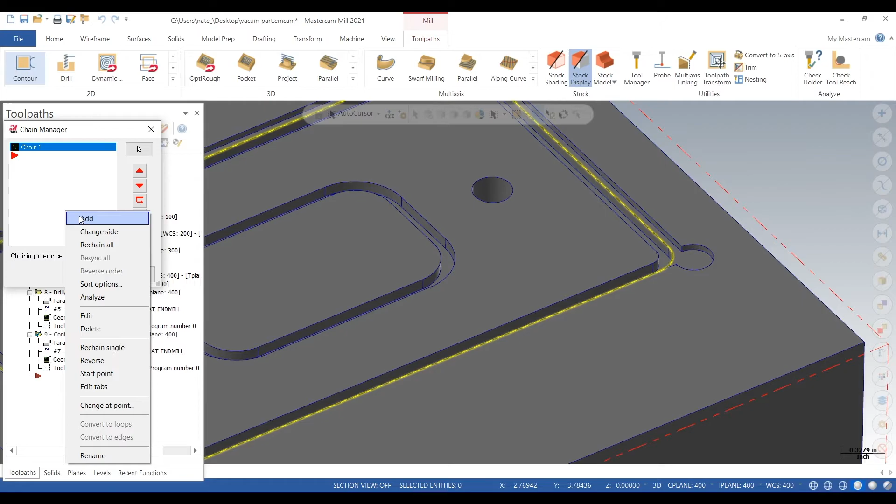Now we need to add more geometry. So we'll select the other side of the groove. Because this groove is 104 thou wide and we're only using a 93 thou end mill, so we need to hit both sides. Now we can actually add the chains of the inner groove. And keep in mind, these grooves are for those rubber gaskets.

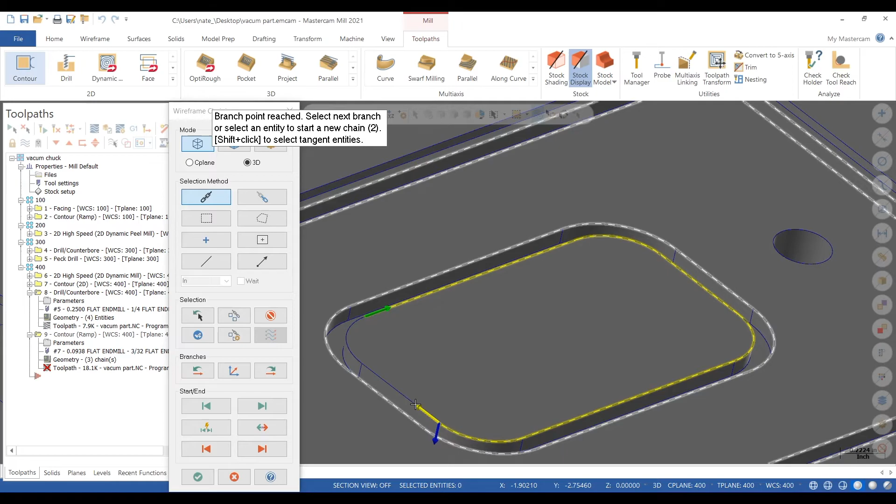So that looks great. Click on Vacuum Chuck, click Verify. Let's see how this thing looks.

So that looks great. So we got our pocket, we got grooves for our rubber gasket we can stuff in there. Next, we just have to add the airways, and we're pretty close to done.

So we go to drill. We're going to spot this hole and drill it through to the hole that comes through the side. So we can use that 3/4 inch spot from earlier.

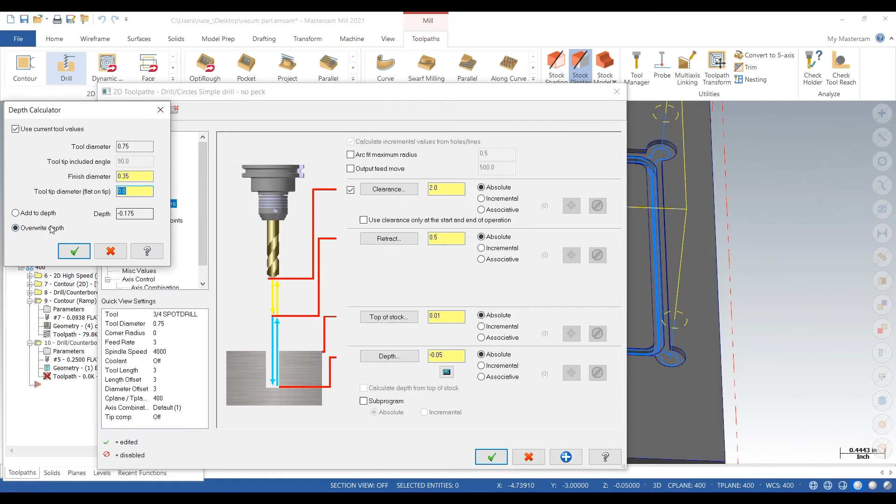Depth, we're going to go minus 50 thou. We're going to calculate our finished diameter of 350 thou and add it to the depth. So that should be good. We're going to double check the diameter of that, make sure that a 350 thou spot is good. And that's a 300 thou hole, so that'll work.

So next we can drill that hole.

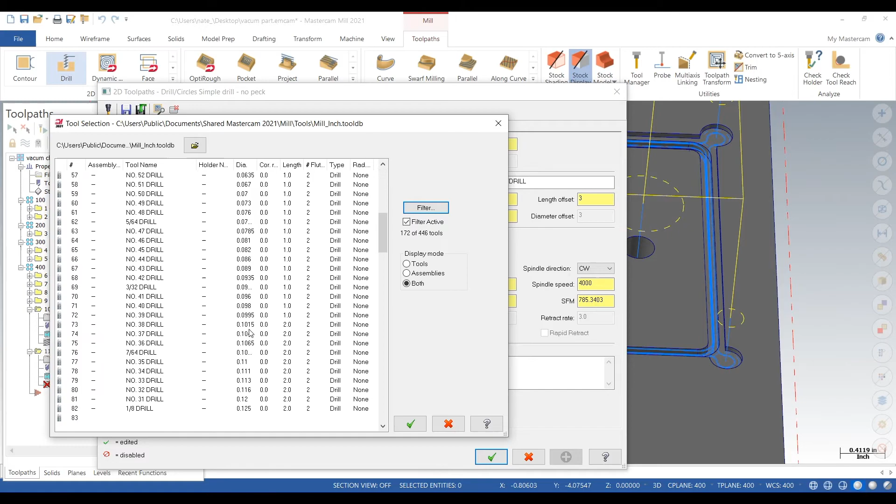We'll call this tool Tool 8. Speeds and feeds, we'll go down to high-speed steel drills. We'll type in our info: 25 inches a minute, 5,000 RPM, cut parameters, peck drill, 25 thou, linking.

We're going to select the center of our side hole as our depth. Okay, so mine is 2.5.

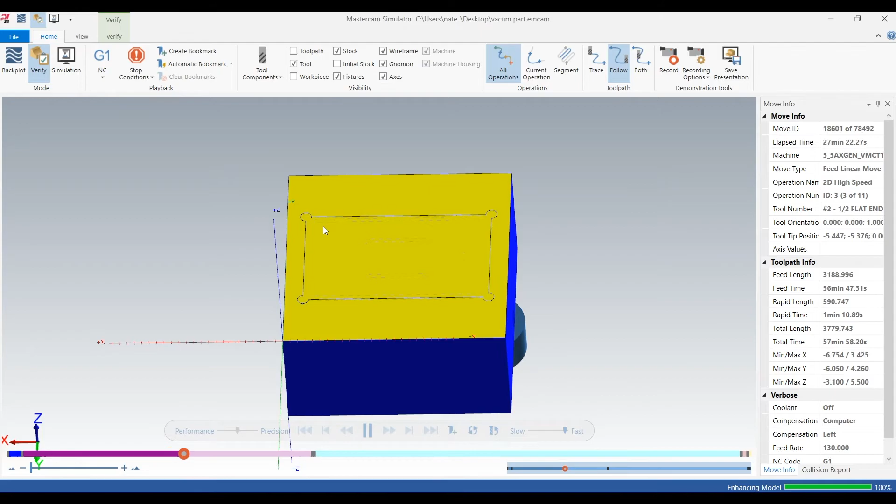Now we can click on Vacuum Chuck, click Verify, and we can see what's going on here. So that looks good. Looks like it's drilling that hole into our hole from the side.

But here I realized that I screwed up earlier, so we can change our tool 5. We'll change depth to 5.5. Click the check, regen it, and re-verify.

Now because of verify, I can tell that I made a mistake. Without using verify, it's kind of hard because you can't visualize what's going on.

So again, we made another mistake. We didn't edit our tool. So we can go back to that peck drill and edit that tool. Change your overall length to 7 inches. Give verify another go.

The cut length is what we needed to change. And with verify, you can experiment to see what does what. So through verify, you can learn more and more about Mastercam.

So it looks like we have a side hole now. We learned that the cut length needs to be just long enough, and that the overall length doesn't matter so much.

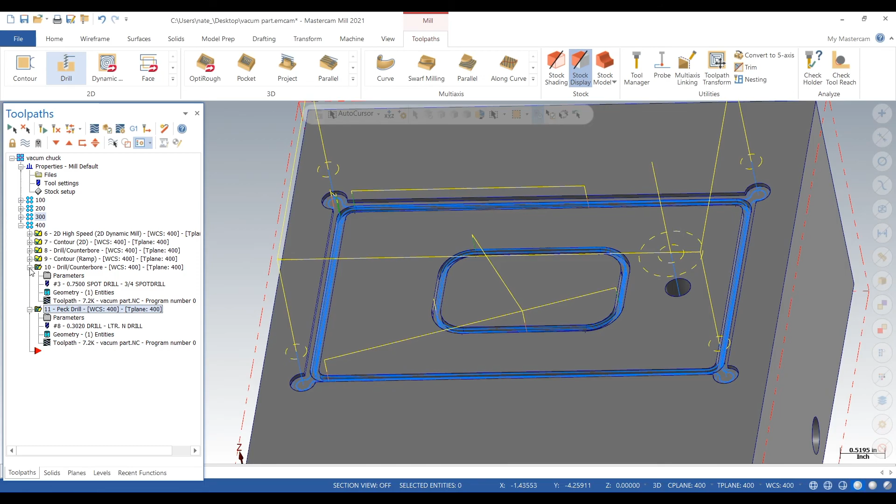Okay, so now what's left is the airway. Now we can activate our level, the airway, deactivate level 8, and now what we want to do is just select all those wireframe lines we drew.

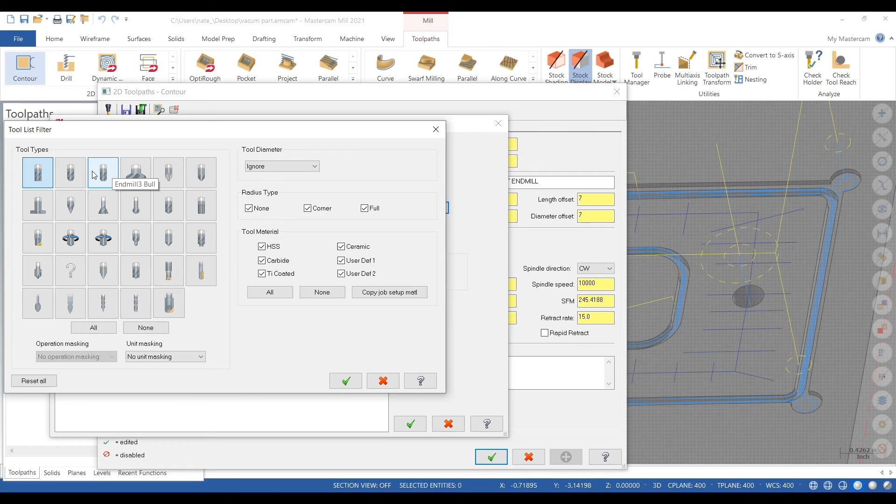So now we want to select a tool. We use a ball end mill, 3/32. We'll edit the tool.

Call it tool 9. Feed rate, we're just going to go really slow. We won't calculate our fastest speeds and feeds. We'll go 5 inches, 7,500 RPM.

We'll go into cut parameters. First, we'll do linking. We'll find a depth. We'll go -50 plus some, so we'll go -90.

Now we can do another verify. Actually, we go back into parameters, we forgot a step. We go to cut parameters. Compensation type, we'll click off, so it goes down the center of that wireframe, not off to one side. No lead in or lead out. We'll regen it.

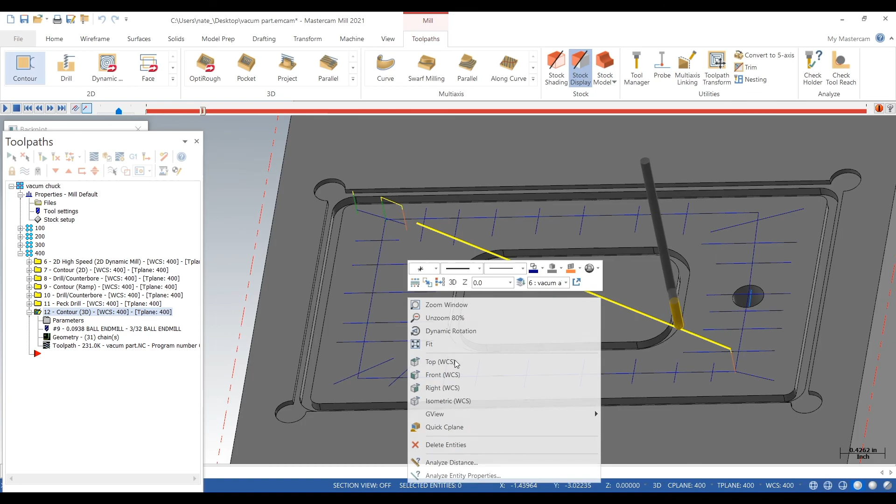We'll watch a back plot. I don't do much back plot, but for this one, I'll use it. And it looks like it's going down the center of that wireframe.

Okay, so that looks good. Now we're going to verify it. So that looks great.

So it's a nice maze-like airway that's going to pull down on our part. And the more you can make that maze cover more of the part, the more even of a vacuum you'll get.

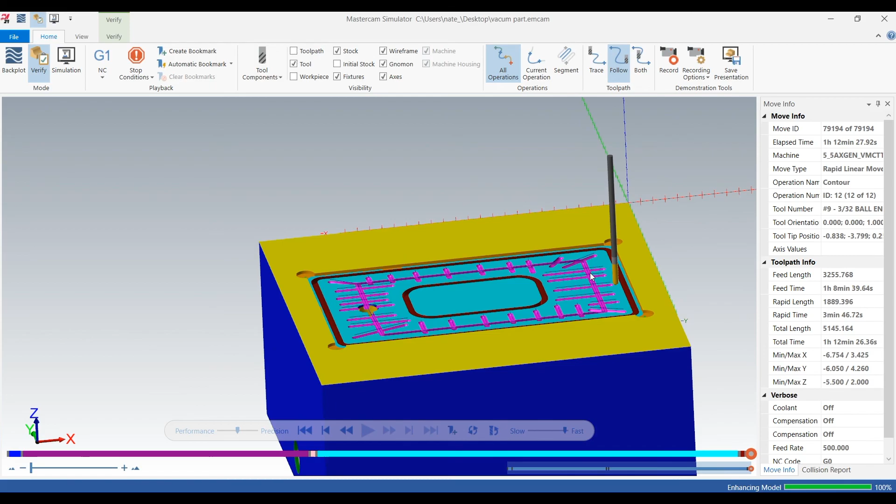So we have a side hole that the air comes through that goes into our pocketed vacuum fixture that holds our part down, and we have a nice tight profile that holds our part into place.